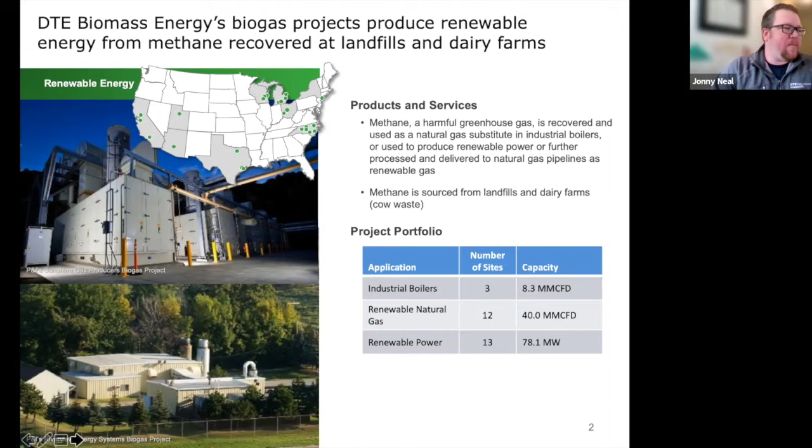So these projects either use biogas as fuel, where we make electrical power, or we clean up the biogas and convert it into a product that looks just like natural gas, which moves through our nation's pipeline and transmission system. You can go to our next slide.

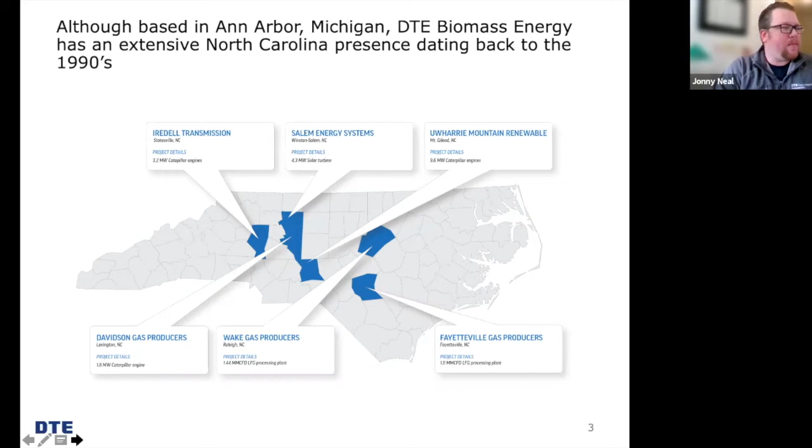So we have a fairly meaningful footprint in North Carolina here, and I know Mike wanted me to touch base on this a little bit, because we have a large group of sites in one area here, and we operate 6 different projects across the state, with one of our oldest projects, Salem Energy, dating back to the 1990s. So all our projects here in the state take biogas generated at landfills and use it as fuel to drive our engines or turbine-driven generators to produce renewable electricity. You can go to the next slide.

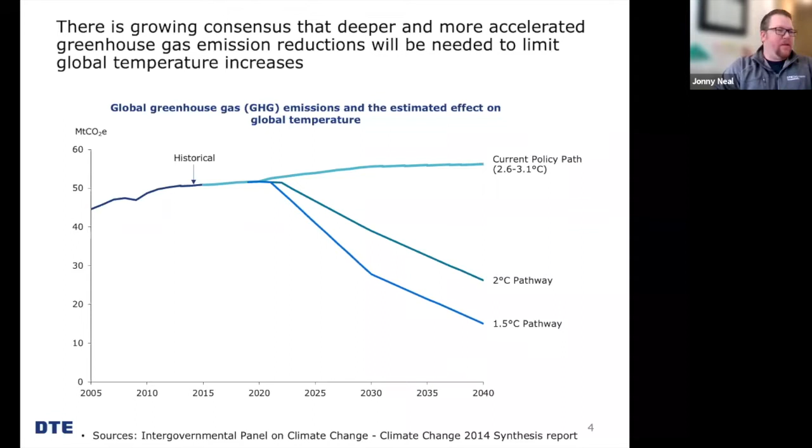So what's challenging here is that this reduction translates to about a 4.5% reduction in emissions each year. And an interesting fact is that's really only been achieved once since 1990. So we've got a long road ahead of us. Moving on, next slide.

Achieving carbon emissions reductions of this scale is going to require significant changes to all sectors of the economy, not just the power sector. We need to start developing new cleaner transportation fuels, electric vehicles, energy efficiency improvements, and changing our industrial processes, including capturing carbon dioxide emitted into the atmosphere and storing it underground, which is actively being done.

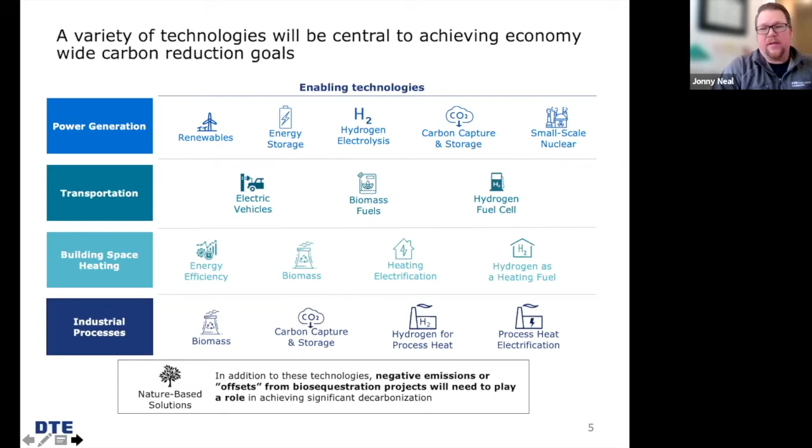What we do has a meaningful impact on the reduction of greenhouse gases as we work to capture the methane generated at landfills and as part of manure management at dairy, swine, and chicken farming operations. Methane is 23 times more potent than carbon dioxide as a greenhouse gas, so anything we can do in our business is even more impactful than reducing carbon dioxide.

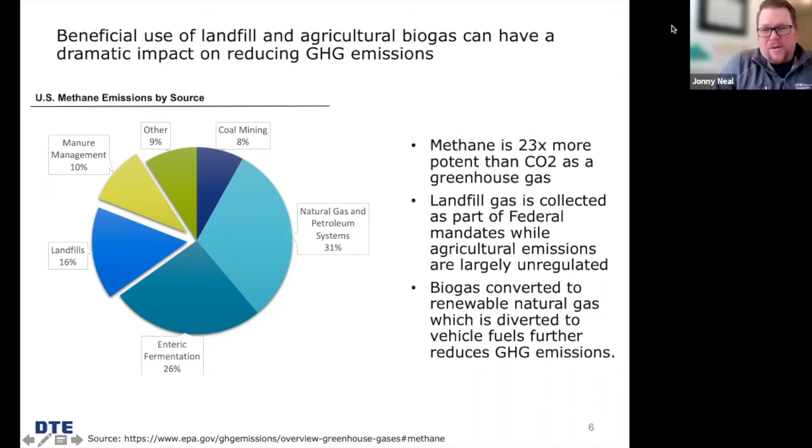When organic waste streams like animal manure, landfills, agricultural waste, and food processing waste decompose, biogas, which is principally methane, can be converted to beneficial use.

Landfill-based projects have been our bread and butter for the past 30 years at DTE, and everyone always asks how we create the biogas, so I'll give a quick explanation. Biogas is roughly 50% methane and roughly 50% carbon dioxide as the two major constituents.

If uncontrolled, landfill gas contributes to smog and global warming and may cause health and safety concerns. So that's landfill gas—but what is technically a current landfill?

30 years ago, regulations mandated and defined what we now consider a sanitary landfill, with some major components to it. Before the modern sanitary landfill, they were technically called dumps, and we really try to stay away from that term now.

I don't know, Mike, if you still consider them that or not, but I would definitely consider it just a dump. It's exactly that—everything just got dumped in, no liners, no collection methods, just what you used to see kind of in the movies. That's what it's like, nothing like that now. Yeah, back it up to a hole and dump it in, right?

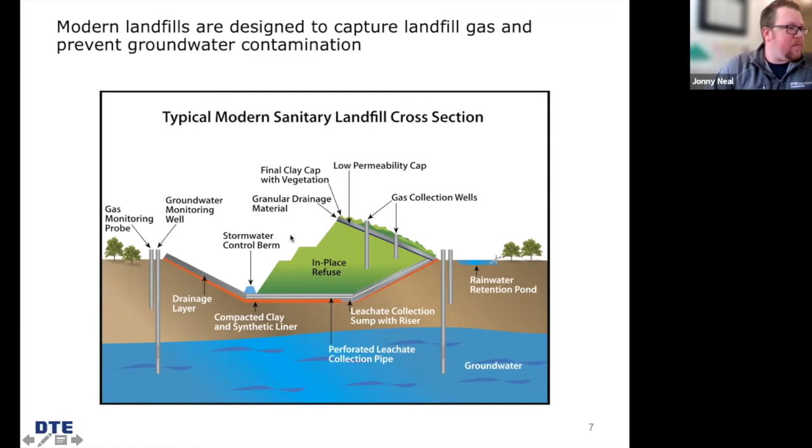We take the biogas collected from our landfills and generally use it as fuel to power either a large internal combustion engine or a gas turbine engine, which is connected to an electrical generator, where we produce electricity and put it back into the grid.

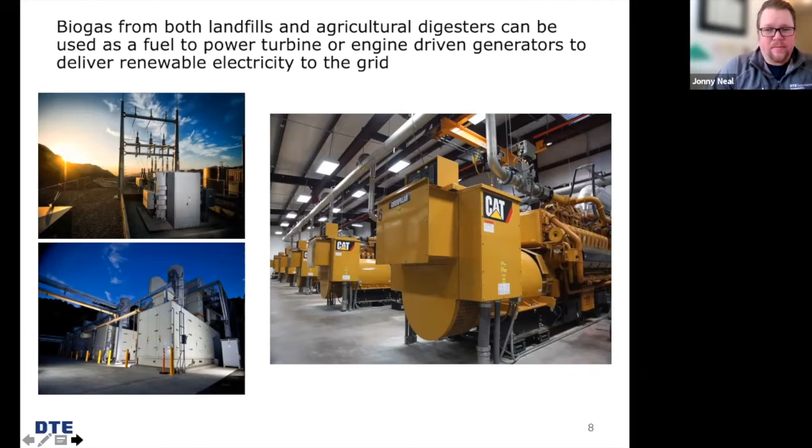We obviously integrate a bit differently at a dairy farm. This is where we start to transition into a different type of work. There are similarities between dairy farms and landfills: the biogas is still roughly 50% methane, 50% CO2, and it's also anaerobic like landfills. We have a lack of oxygen, but we do have a little bit of sulfur that also comes from the manure.

Currently we have contracts with large dairy farms, and by large I mean 5,000 to 9,000 head of cattle. These farms are very well run, and the farmers work hard to maximize value from everything they're doing. The dairy cows at these farms, along with producing up to 6 to 7 gallons of milk per day per cow, produce between 40 to 150 pounds of manure per cow a day as well.

Without a digester, a farm would usually collect manure in a lagoon and then land apply it for use as fertilizer, as a liquid spray, or use it as direct implementation. That's good, but part of that process is a lot of methane is emitted into the atmosphere when we have these open lagoons.

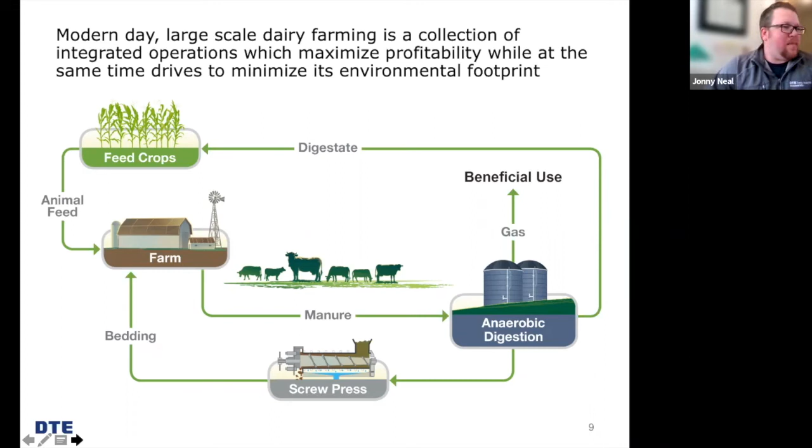I've shown you how the biogas is created, but the gas is captured and processed into pipeline quality standards using well-proven technologies. The RNG, renewable natural gas, can then be transported into the nation's existing pipeline infrastructure and delivered to fueling stations designed to pump liquefied or compressed natural gas into vehicles. So we're going from farms to vehicles.

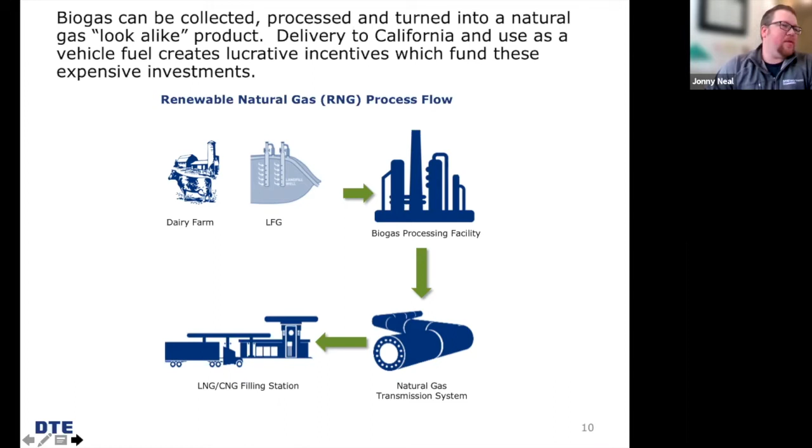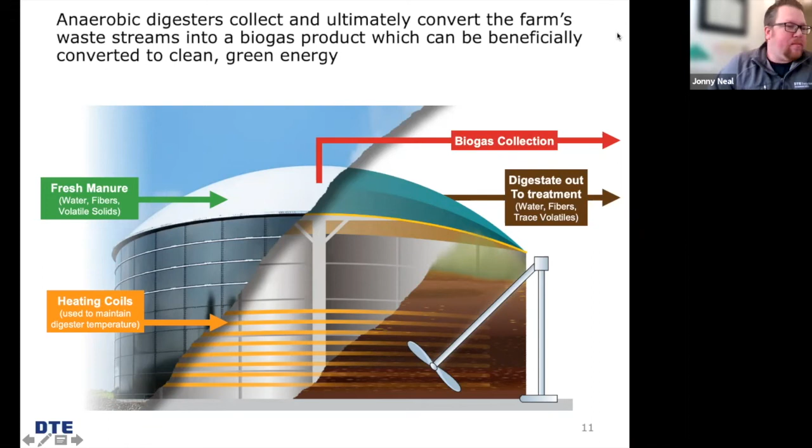Manure on average resides in the digester for about 20 days, and that's really how we design these tanks, to hold the maximum amount for that 20-day period. The tanks pictured here are 800,000 gallon tanks, and we have some newer ones around 1 million gallons. I've even seen design specs for ones that go all the way up to 2 million gallons.

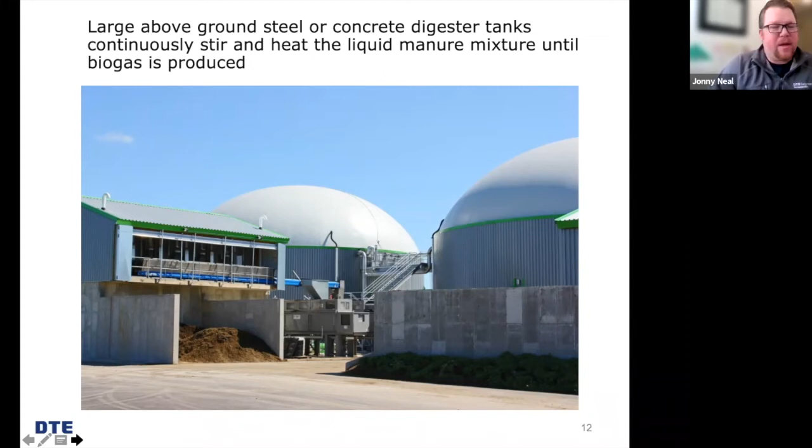So now that we've generated the biogas, we need to clean it. We need to polish it. We need to convert it to pipeline quality renewable natural gas, which can then be injected into the pipeline for transportation to market. There's several technologies to accomplish this, but at DTE, we use a membrane system that separates the desirable constituent, namely the methane, from the biogas stream from the digester.

The individual components of the gas have different diffusion rates through the walls of the membrane, which allows for a controlled separation of the gas. The methane moves through the straws lengthwise to the other end, while the less desirable contaminants, CO2 and H2S, permeate through the walls of the straw, where they're then directed to a flare for destruction.

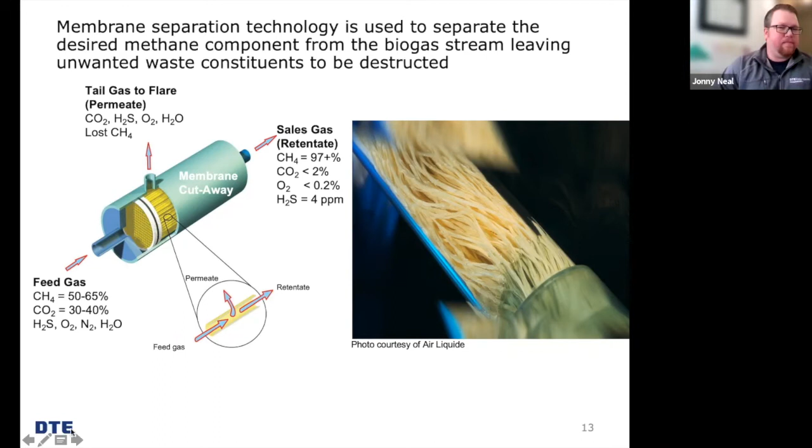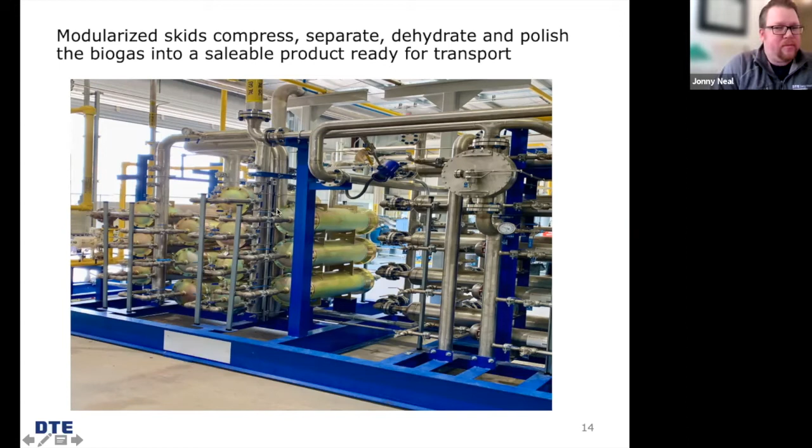So we've created the biogas, and now we've cleaned it and polished it, and turned it into a pipeline quality product. We now need to get it to the market. Very often these dairy farms we're working on are in very rural areas, and they're not near a point where we can conveniently and economically inject it into the gas pipeline.

Our system will fill one trailer, and once that trailer is full, we'll automatically switch over to the second trailer. At that point, we contact a driver to come pick up that first trailer and truck it to our station that sits atop the pipeline. Mainly because dairy farms are a 24-hour operation, we always have someone on call for this.

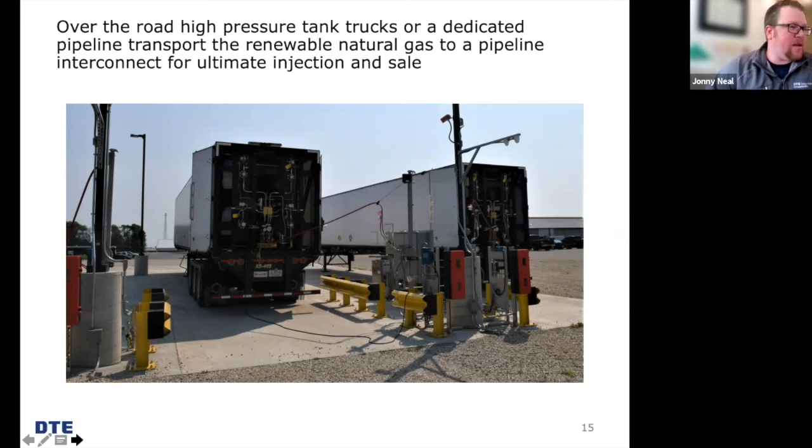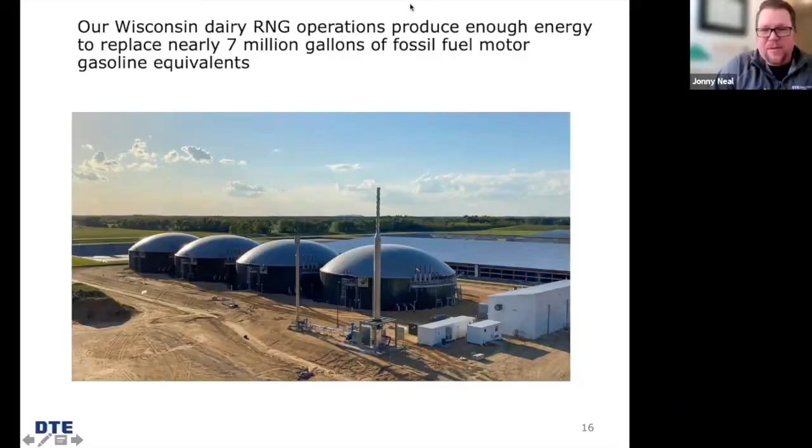I'll start off with the recent situation, like Texas — my daughter lives in Dallas, so she lost power for a few days. What's the consistency of the gas out of these compared to what they're dealing with, like wind and solar down there?

These are proven to be very consistent. We're operating these in cold states, like Wisconsin, where a lot of these dairy farms are. They're kept at a pretty consistent heating level, so we're not worried about anything freezing up on us. As for solar and wind power, even wind power in Michigan is not continuous — it's generally generating electricity only 20-30% of the time. So this is something that is continually ongoing, Mike. It's got a pretty good success rate.

I'll chime in with one more question. I know I've been involved with other digesters - we have one dairy farm we're working with right now, but others take food waste in. You have very consistent volume, obviously it's all the same, but these food guys are very particular on what they take in. What's the difference in the process of that type of biodigester compared to yours?